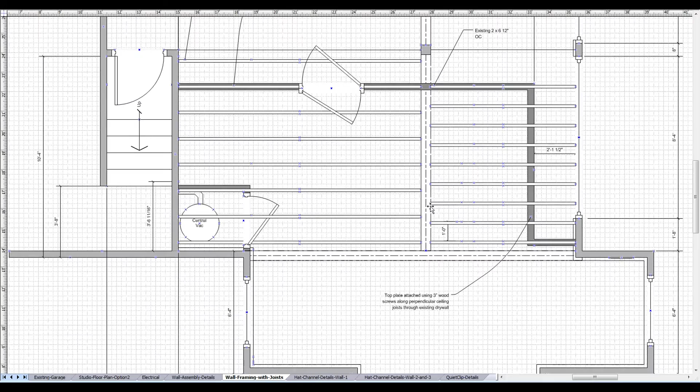So these are spaced 48 inches maximum distance. They want to be 6 inches or so from the ceiling and the floor. And if you can, use a staggered pattern like this, which helps isolation in that you don't have such a rigid structure right on top of each other.

The astute observer will note that the floor is actually slanted here. It is a garage, so there's a slope to the garage floor. I studied this for a while, whether this should be shimmed up or what the best way to do this was, and it seemed like the easiest way was basically just to lay the sill plates on the floor with the slope, and then you just have to cut each of the studs individually to the proper height.

Makes the door opening here a little bit interesting, but I think that's fine. It drops a little less than half an inch across this opening right here, and that can be accommodated with the threshold under the door, and just cut the door a quarter inch to half an inch going across the side here.

The inside of the room is going to be carpeted, so we've got to raise the inside door a little bit as well, which will help when you open the door, since the bottom part of this door is going to be lower than this part of the door. As you swing the door around this way, it would hit on this side over here because the door is lower on that side. But we'll have carpeting there, so that should take care of that.

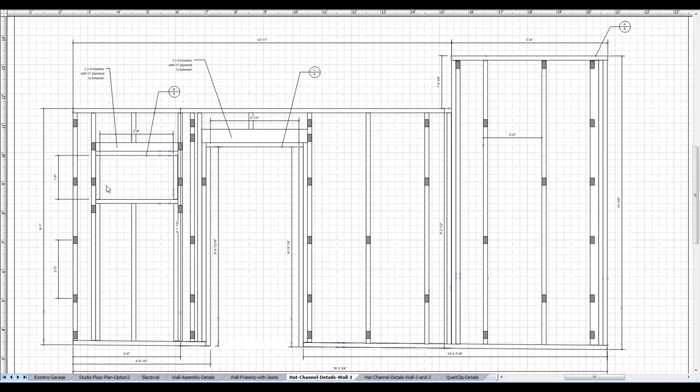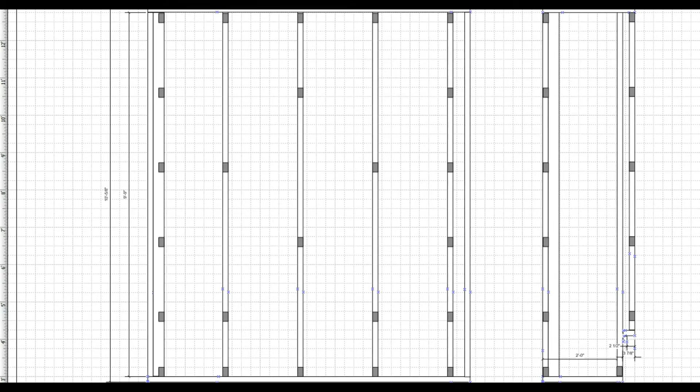So here's the layout of the other two walls. This wall here is totally straightforward, nothing complicated here. Again, here's the layout of all the QuietClips. This remaining wall here is a little bit goofy because the foundation on the outside of the garage juts out a little bit there, so you have to be able to handle that, but other than that, it's straightforward.

This again shows the layout of the QuietClips and the hat channel, but this shows much more detail here about how the drywall is laid out, and you can see the drywall here doesn't butt all the way up to the other wall. You leave a quarter-inch gap here and you fill that in with acoustic caulk. And all the little corners here, same thing, you leave a quarter inch everywhere and you fill it all in.

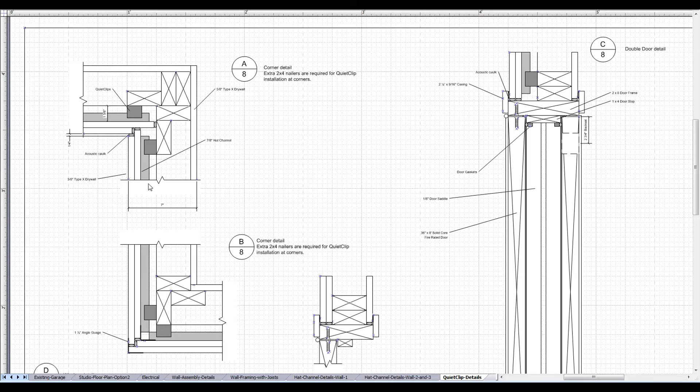The idea is you don't want these pieces of drywall to be firmly attached anywhere, because that creates what they call a short, where the vibration from the drywall goes directly into the wall and then it's going to radiate back out the other side over here. So you want everything to be isolated as well as you can. So this is the outside corner on the top. Here's the outside corner on the bottom. I'll zoom in a little bit here.

You can see here is the diagram for the window opening. We call out two different sizes of glass here, 3/8 and 1/2. That's due to the fact that the glass will resonate at a certain frequency based on its thickness and mass. So using two different sizes of glass here will keep them from reinforcing each other, so they'll hopefully cancel each other out a little bit.

This is all 1x stock in here. This is a 1x6 ripped to 4.5 inches. I had the lumber company do that for me because I don't have a table saw. If you have a table saw, you can do that yourself, of course. This is a 2x8 right here. And we call out 2¼ inch casing here. And this again shows the drywall coming in with all the acoustic caulk.

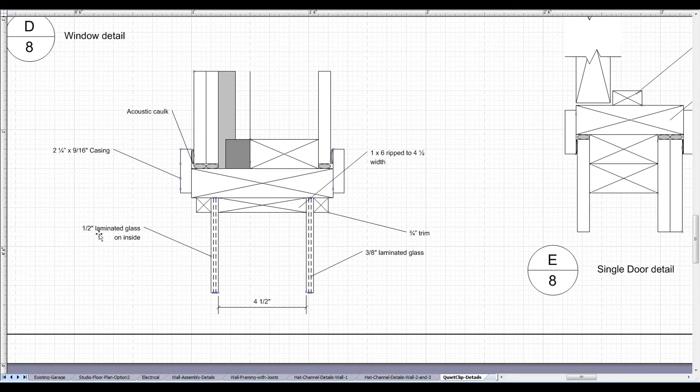This is one of those miracles of modern technology here, I guess, that a 2x8 here worked out with just about a 1/16 of an inch clearance on each side here. So we're able to put some acoustic caulk on the casings here, so again they weren't in contact with the drywall directly. So that worked out pretty nice. This is laminated glass here. Again, nice heavy mass, not going to bounce around too much.

Here's a diagram of the single door. This is the one over by the central vac. This is a 2x6 now in this case. This is a 1¾ inch fire door, 1x2 stock to act as the door stops. The same casings over here that were called out in the window diagram.

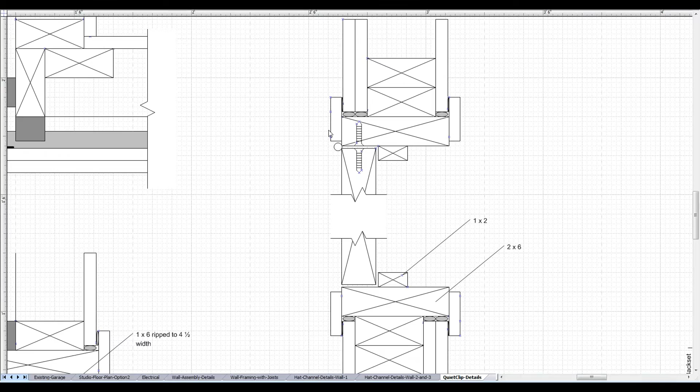And over here we have the diagram for the double door. So this construction's the same thing that we saw for the window. And here we have again 1¾ inch fire doors. The hinges are offset, so one door opens up one way, one door opens up the other way. We're using the 2¾ inch back set. This is the deeper back set of the two when you put the door hardware in here, just to give yourself as much clearance as you can in case you're putting isolation, gaskets, and things like that. You want to leave yourself some room.

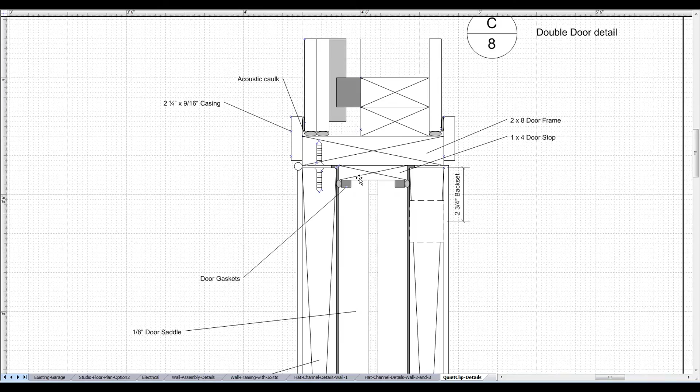This is a standard 1x4 here for the door stop. And then on the bottom here, on each side, we have door saddles or thresholds that go underneath the door. And then here you can see the opposite way. The hinge is on this side down here.

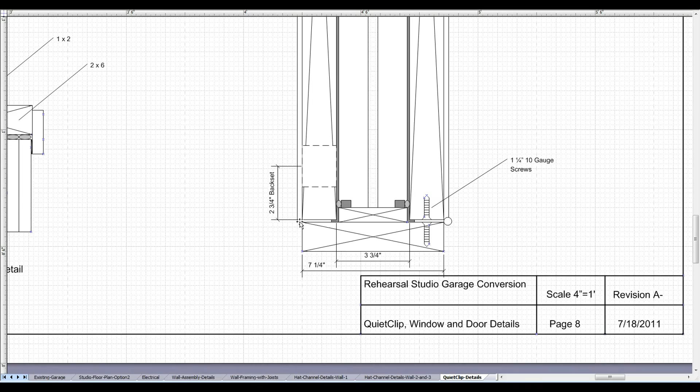You want to leave a 1/8 inch gap everywhere around the doors here. The door is not drawn beveled here, but it is actually beveled to allow the door to open more easily. And this is standard stuff here. So again, the 2x8, when you get up to that dimension, it's actually 7¼ inches, not 8 inches. And you can see that works out absolutely perfectly for this door.